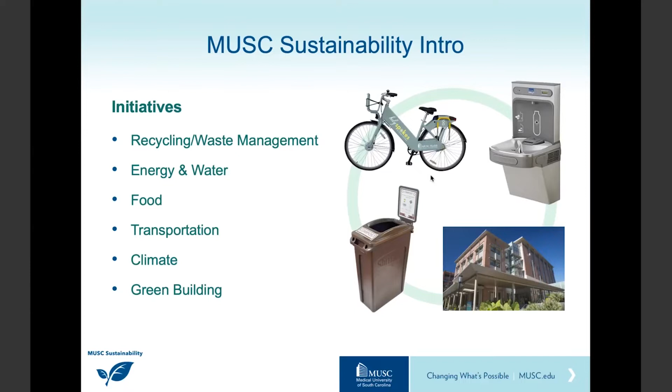We have two presenters today. Christine von Kolnitz is the Sustainability Manager for the Medical University of South Carolina. Christine is an accredited commercial energy manager and a South Carolina DHEC certified recycling professional. Upon graduating with a BA degree from the College of Charleston in 1992, Christine worked as the recycling coordinator for the college. While there, she was instrumental in establishing the South Carolina DHEC Collegiate Recycling Grant Program. Christine became the first recycling coordinator for MUSC in 1995, and then the first sustainability manager in 2005. In 2018, Christine was appointed to the City of Charleston Resiliency and Sustainability Advisory Committee. Christine was appointed to the City of Charleston Green Committee in 2007 and served as chair of its Recycling and Solid Waste Subcommittee until May 2012. In 2004, she co-wrote a recycling book titled Recycling and Beyond, a college campus primer. She is a member of the board for the MUSC Urban Farm and MUSC Arboretum, a Clemson Extension Master Waste Educator, and current chair of the Robert Lunz Group Sierra Club.

Our other presenter today is Dennis J. Frazier. Dennis coordinates the advisory committee planning for the Charleston Medical District, representing MUSC and the CMD. In 2015, Dennis led the effort to create a Charleston Medical District Greenway. In 2018, he joined the city-led flood mitigation effort representing the CMD. He traveled with the city team to the Netherlands to participate in two Dutch Dialogue work sessions in 2019. He was the MUHA administrator for facilities and capital planning, overseeing all facility functions, including building the Ashley River Tower and planning the new Children's Hospital. He is a West Point graduate with a BS in engineering and an MBA. Dennis and his wife, Mary, have lived in Charleston since 2004.

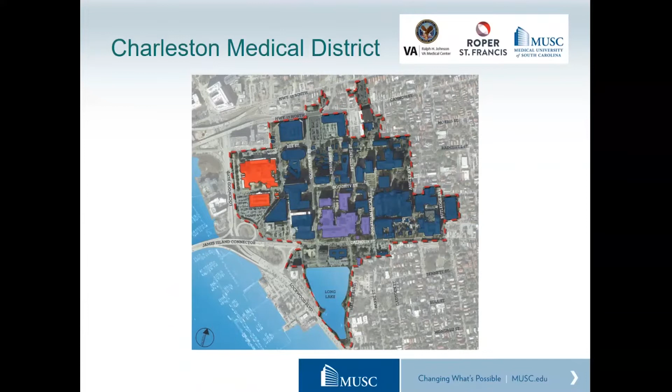This slide shows multiple causes of flooding. The flooding is caused when we have increased precipitation. When it rains, the water comes into the city of Charleston, and it's very difficult for it to get out because the city is such a flat surface. In this slide, you can see how the city is very flat without a lot of topography. So rainfall is carried out of the city through the storm drains, and that storm drain system becomes overwhelmed relatively quickly.

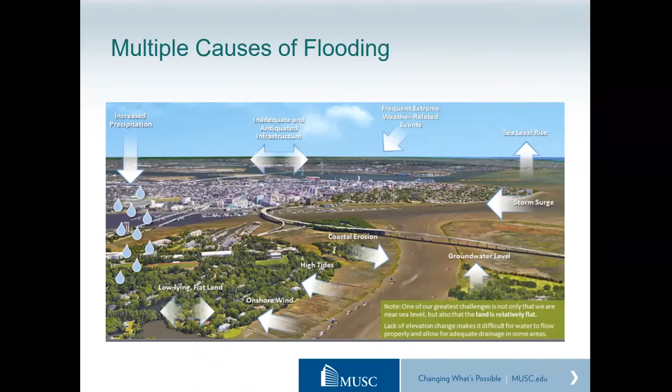So these are the highest tides recorded in Charleston. As you can see, we've got a 12-foot tide back in 1989. That was one of the highest. And then an 8.64 tide in 1934. This is a long range of time that these high tides are happening.

And in these pictures, the top picture, you see a blue piece of tape on that tree, and that's showing the level of inundation that we could have if the predictions are correct. That's a 3-foot level, and that is what is predicted in sea level rise for the city of Charleston by 2050.

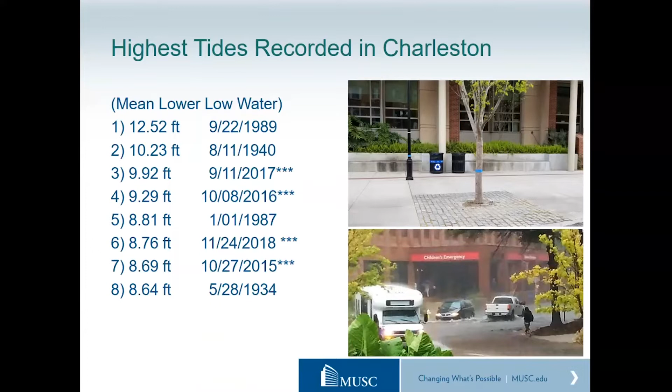The bottom picture shows our now older children's emergency room. We've since moved that. But that is during a spring rain event. That is not a major hurricane. That is an event you can see cars are driving through it, people are walking through it. It's not an ideal situation for access to MUSC.

The flooding affects the entire Charleston Medical District. In this slide, you see the red outline is the medical district. And the light blue, I don't know if you can see my cursor, but light blue is on Bee Street, Courtenay Drive, Ehrhardt Street, flooding on Ashley Avenue, a little bit of flooding on Calhoun Street, and definitely around Long Lake.

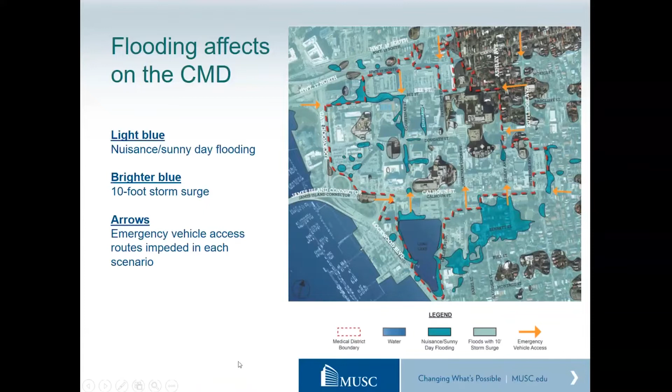These pictures show flooding events that have happened in and around MUSC. So we've got this picture here on Ashley Avenue, and that is a rainstorm. We've also got this picture that's showing a road closed with someone still trying to drive through it, and that is over on Hagood Avenue.

Down here at the bottom, we have two pictures from hurricanes. One is Ehrhardt Street. This is the lowest point on the MUSC campus, and this street serves both MUSC and Roper Hospital. And then this final picture shows inside the ground floor of the Ashley River Tower, and this is floodwater that's come into the ground floor of that building.

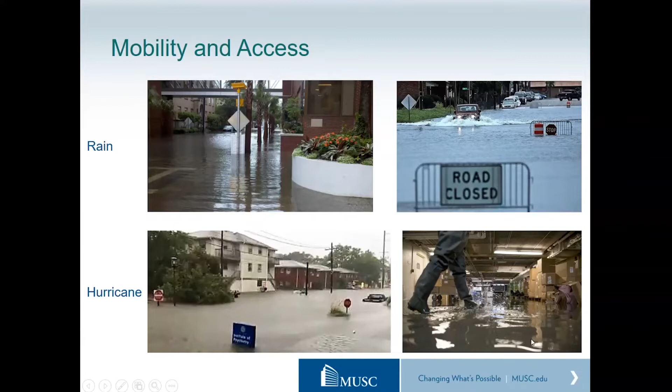Some other mobility access issues. We've got a nurse here at the top. She's walking back to her car at the end of a shift, and she's having to walk through floodwater. Right below that picture is a picture of our public safety. They are trying to get a doctor from one building to another building during a hurricane, and he's having to be taken in a boat.

Down here at the bottom, we have a picture of a military vehicle. This is the South Carolina National Guard. They helped MUSC by bringing their vehicles down, and we used these vehicles to get doctors and nurses from the outer edges of our campus into the core buildings so they could do their jobs.

And this picture on the left top is one of our grounds workers, along with some public safety officers, and the grounds worker was taking a patient to the hospital in this vehicle.

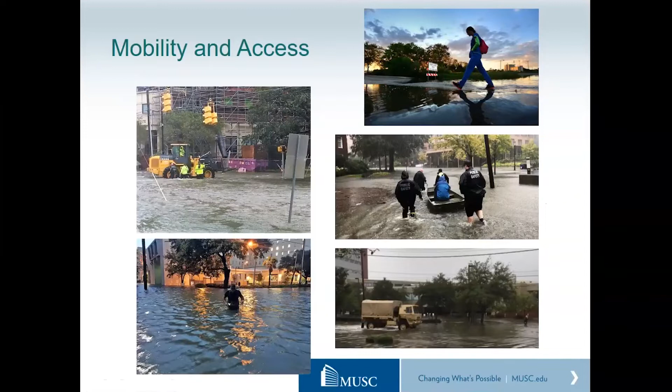And at the bottom, we have one of our engineering facilities employees. He is having to wade through the flood water. He is on Calhoun Street, and he was trying to service a building during the hurricane.

The cost and damage from these events, you can imagine, is extreme. Just from an engineering and facility standpoint, the cost to MUSC alone can be approaching $1 million. And we look at Matthew, Irma, and Dorian, and other ones.

But the cost goes beyond that. It's the disruption of services. It's the rescheduling of patients, or patients that can't get in. It is labor that has to stay at the hospital and not get home for a while. And in other cases, critical supplies and services can't get to the medical center.

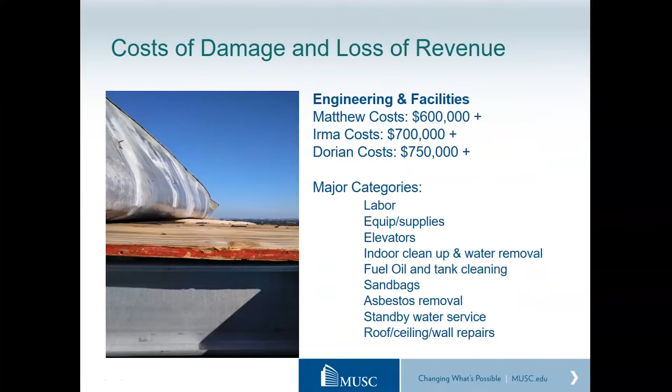So when you look at that in terms of all of the medical district with Roper, the VA, and MUSC, we've been working with those institutions to determine what the cost will be. And at this point, we know it exceeds around $10 million or more a year, and that number is increasing because we're having more frequent flooding. So the cost is already high, and it's going up.

The strategy that the medical district uses is the same as each of the institutions, but it's coordinated. And we're also working with the city.

In general, what you need to do is slow the rain or water down, whether it's coming from above in precipitation or coming ashore in a surge or tidal influence—whatever the reason, you try to slow it down. Sometimes you need to store it, in a pond, a lake, a cistern, or the drainage system. And then finally, when the tide system goes down and the high water event is receding, you try to get rid of it, pump it back out, eventually onto the river and on out.

We deal with it in terms of elevation. We need to elevate some roads and access points, walking points, to be above the flood area. Maybe not every road initially, but enough that you can get from the key points between the buildings of each institution and between the institutions themselves and from off campus. People coming from I-26, or from the crosstown, or from James and John Island, all need to be able to get to the medical district.

Check valves, which we'll show you slides in a little bit, help control the tide water that water drains out, but you want to be able to stop it from pushing back up through those same drain lines. We are in the process of completing deep tunnels, which help drain the water off and pump it to the river. We're looking at surge protection with raising the edge of the peninsula, perimeter type protection to knock down a surge. And then we're also working hard to plan and prepare how we organize and work together and have the right resources in place.

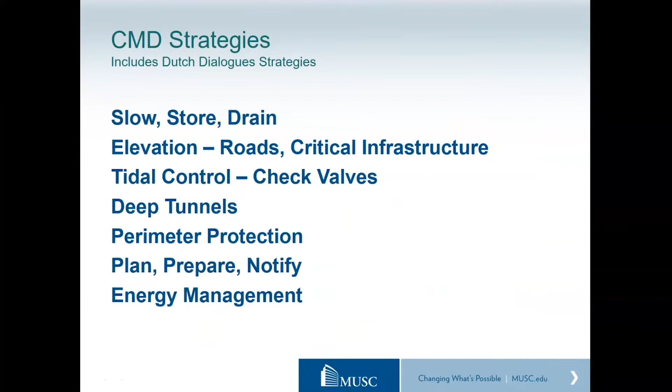And then to be sustainable, we need to be able to provide and deliver those services. We need to have fresh water, food, and to keep the workers and the patients and the people that are in the area able to work and live. We need to have energy in terms of heating and cooling and electricity. We need to be able to get them to the medical district and then back out.

The Dutch Dialogue is a term that represents a company that the city engaged a few years ago to help us plan how to deal with floodwater. As the mayor explains it, the Dutch Dialogue Group has been working on flood management in other parts of the country, and they were working with engineers and scientists in the Netherlands. And so the city of Charleston has brought over the people from the Netherlands and from the Dutch Dialogue Group here in America.

We had two 5-day work sessions in 2019, which brought in well over 100 people from different agencies to help figure out what was needed and create a plan for Charleston. Charleston was divided into 4 major areas of focus: an area on Johns Island, an area in West Ashley, an area near where the Ashley River or the Cooper Bridge comes onto the peninsula, and the medical district.

This shows the drainage plan. These represent areas that drain. Calhoun West has a drain plan contemplated to begin in the next few years. Spring Street, called the Spring Fishburne Plan, is a drainage area nearing completion, probably around 2022. There are other areas more defined around the VA hospital, around the marina, and in the center where these areas come together, called Earhardt Shaft.

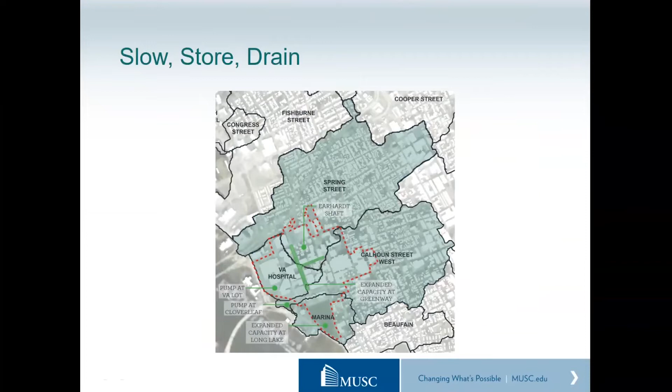You may recall that picture that Christine showed where it was deep water. There's an extension being planned to connect to the Spring Fishburne project and drain that area.

When we catch the water, it gives you an idea how water comes down on our buildings in the medical district. Sometimes we have green roofs, or the ability to catch water and store it into underground cisterns, or perhaps the vegetation helps absorb it. You want the land and the surfaces for walking and driving to be as pervious as possible so water can get through and be absorbed by the ground.

Excess water can flow towards the river, but we might catch it in a cistern, or in the case of a lake such as Long Lake, we might store it there, and then eventually it will get to the river. We're looking at the potential for Long Lake, as an example, to have more capacity, either by making it a little deeper or raising the edges.

The last thing you see is a barrier of some type that will stop a storm surge from coming ashore and doing great damage. That barrier might include a nice plaza. Think of the High Battery downtown, where you have an area high enough to keep the surge of water from coming in, but it's also a nice public space so people can walk along and enjoy it.

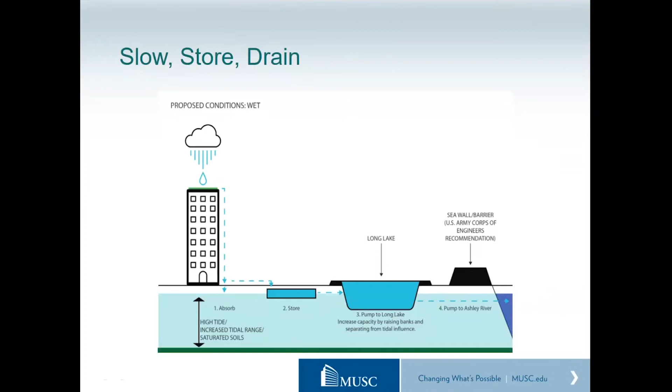In the medical district along Doughty Street, these pictures show how when we closed Doughty Street in 2017, we got it immediately for public use as a space to rest and get some food. It will also become a way of connecting north and south from the Ashley Avenue and the main campus of MUSC, the Horseshoe, over towards the Ashley River Tower on Courtenay and the Children's Hospital.

You see that elevated walkway to the right of the top right image, going past Gazi's. That contemplates an elevated walkway which solves one of our problems: when we have floodwater, people could be indoors and walk back and forth between the different institutions, not only up and out of the floodwater, but also in a conditioned space so you could even transport patients if needed. This connection could also be connected to Roper and the VA eventually and serve us all.

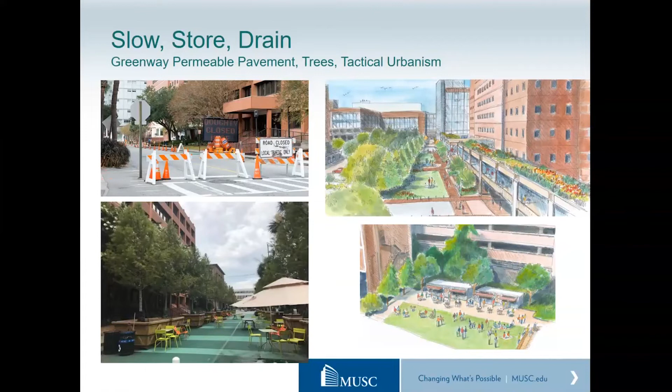The drainage of the medical district also involves existing systems, some of which have been stopped up for various reasons—they're old systems, but they also might have debris in them. The picture on the left shows that recently the city has engaged a company to come and vacuum out these lines, which happen to be under the Greenway on Doughty Street. The picture on the right shows these trunk lines, and the yellow one is between the VA and the hospital, serving Ashley River Tower and the new parking garage that serves both. It has been cleaned out.

The orange lines are planned to be done relatively soon, where they will go in and vacuum out those lines to improve the drainage, and then beyond that will be more of the cleaning out in those other areas which are colored purple.

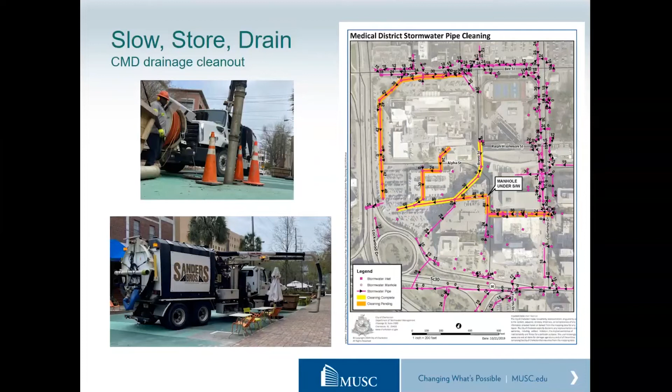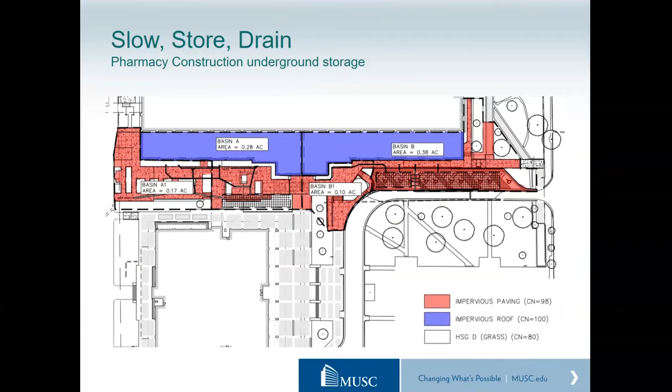Eventually, when the normal storm drain system is able to handle it, that water will drain off naturally.

Other things MUSC is doing: we have a tree policy where all trees equal to the total caliper inches of trees removed will be replaced. Here you can see the front lawn of MUSC with our really old oaks. Trees really do take up a lot of water, and they're a big part of our plan.

One tree can lift up to 100 gallons of water out of the ground and discharge it into the air each day. We are a designated arboretum, a Tree Campus USA, and now a Bee Campus USA. We are really working on our trees.

Then we've got this area off of Cannon Street called a bioswale. We've got trees in there that take up water, and other plants in there that take up water. It's an area where water can flow naturally away from the streets and allow access to continue on our streets.

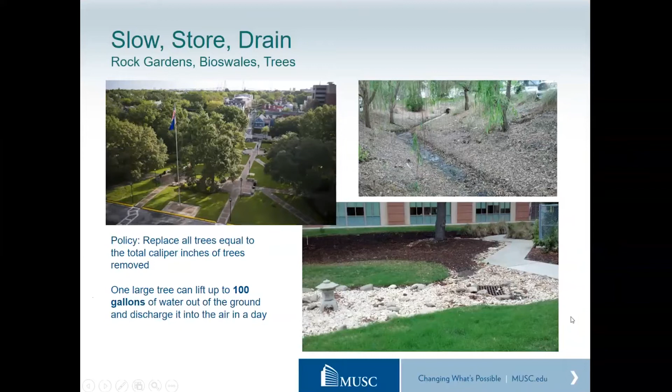At the bottom here we've got a rock garden, and that rock garden allows all the water flowing down toward that drain to go very naturally out of the system and into the drainage system.

We also are employing rain gardens. This is our first rain garden in our urban farm, and we're using natural plants here to take up water.

This bottom picture shows this roof line draining into this cistern, which holds about 350 gallons. That cistern overflows into the rain garden. We've got a whole connected system here in our urban farm, draining water away from our farm.

On the right top we've got a picture of our rainbow row, and we do intend that pun. All of the rain off of this roof comes down into these rain barrels, so we are also capturing water there in our urban farm.

The picture below right is a pervious pad. Our grounds crew is working on not putting down more impervious surfaces, so anytime they need a very flat surface, they're doing their best to make those surfaces pervious and drain water away from the campus.

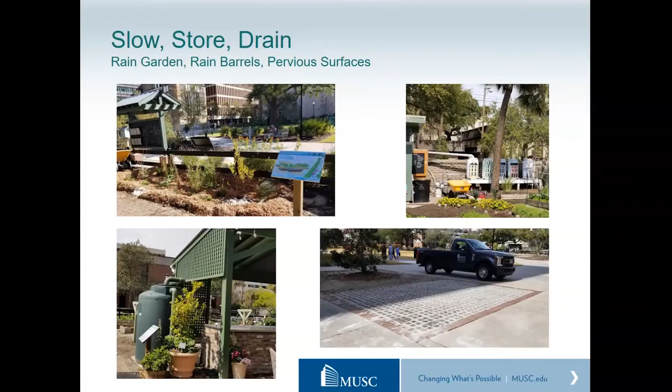The city of Charleston is working very diligently to help control tidal flow coming back into the city through the drain system, so we wanted to explain what a check valve is.

Check valves are inside of the storm drain system. They work so that water can flow out of the city but not flow back into the city. Here you can see water flowing through a storm drain, and the check valve will open one way and raise up, allowing that water to flow out into the river.

Now, when we have a high tide, the check valve works in the opposite direction. When the tide tries to come back through the storm drain, the check valve stays shut and will not allow that water to come back into the city. That is how a check valve works.

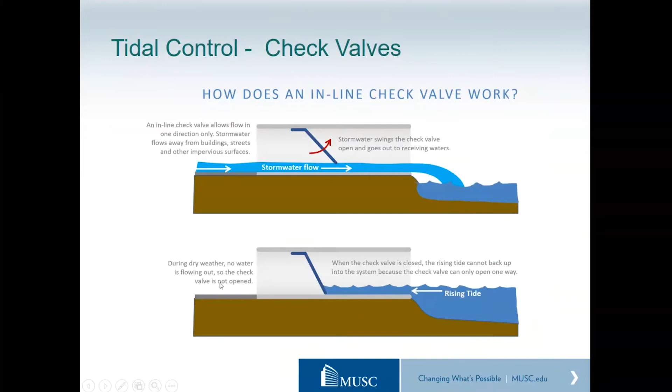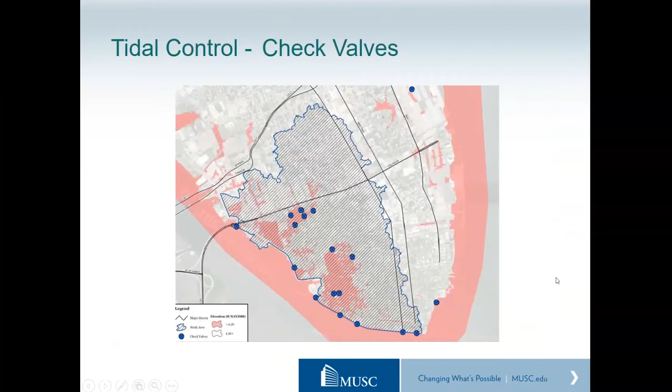The city of Charleston is employing these check valves. All of these blue dots on this map show where the city of Charleston is putting in check valves, and that is keeping water from the rivers from coming back into the city.

We've got two pictures here to show visibly what these storm drains look like. Here's a storm drain at low tide on the Ashley River. You can see the Ashley River Bridge in the background and the marina, and there's a person here to give you an idea of how large this drain line is from the city. You can see the water flowing out of the city, and it's a sunny day, so there's still water coming out.

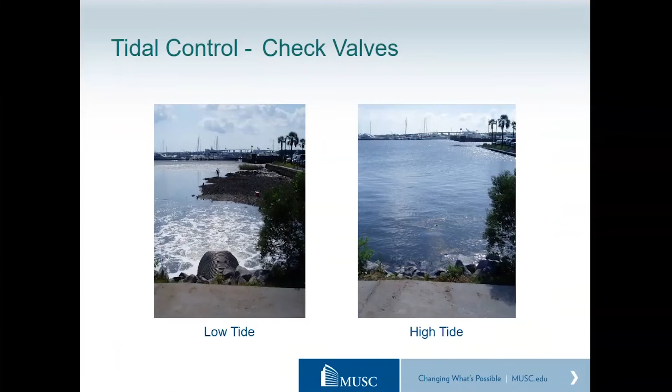And then here at high tide, you see that drain line is completely covered over. So that is what happens in the city of Charleston. If we did not have check valves in the drain lines, that water could flow right back into the city of Charleston.

The elevation of key infrastructure is critical to be resilient, to be able to sustain yourself, whether it's a hurricane or high water. When we built Ashley River Tower, and more recently the Children's Hospital, it had all been planned with an energy plant that was elevated above ground. If you've ever parked in the Bee Street garage, the end of that garage towards the VA has the energy plant, which serves the Ashley River Tower, the Children's Hospital, and also has capacity and size to serve the future third phase of the hospital, which will go where the fitness center is.

In the main hospital and Children's Hospital, Storm Eye area, their systems years ago were not elevated as high. So around 2015, 2016, Medical University Hospital Authority built this energy plant this picture shows, which is up above the ground, and took use of every available space. You can see a part of it is even cantilevered out over the roof of the children's hospital side, and it provides the heating through steam generation and the cooling through chilled water.

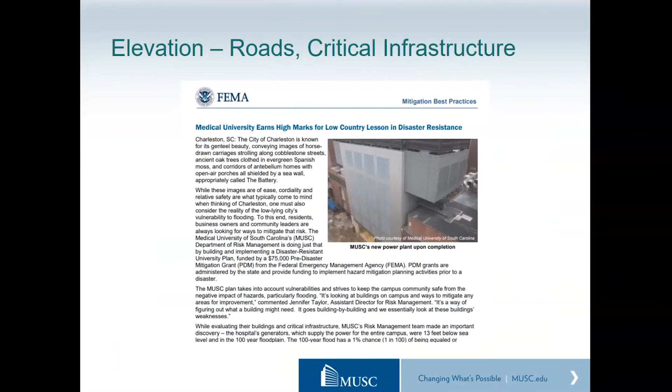Next slide. Here's another example of elevation. Top left is over between the fitness center and Ashley River Tower, where that air handler and related equipment was elevated up so that it would be up and out of the flood water area.

The bottom left shows where drug discovery and bioengineering, when they were built, were wisely raised up, so the flood water down on Jonathan Lucas and President Street are down lower. The other street there is Hagood Street, going from the crosstown towards the Citadel, and you'll see how flooded that is. In the future, the West Edge project, which has already elevated some of its streets, has a plan where this street can be elevated enough so that you can get on that street and move through it during high water conditions.

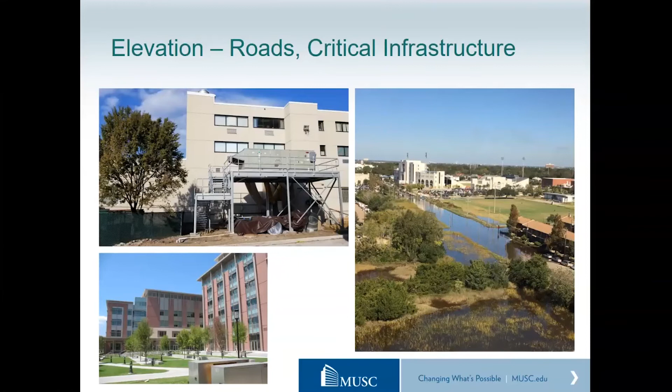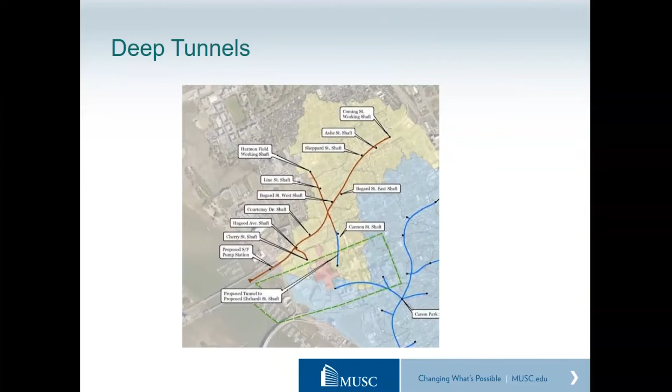This is a deep tunnel, looking down vertically. This is a shaft planned for Ehrhardt Street. You may recall when Christine showed a picture earlier where it was said to be deep - Ehrhardt's one of the lower points in the medical district. This shaft is being planned to connect to the Spring Fishburne project in the next 2 years, and will help increase the drainage in that Ehrhardt Street area, but it will also serve out towards Bee Street, back up towards President, and out towards Courtenay, and over towards Roper. All will benefit from this.

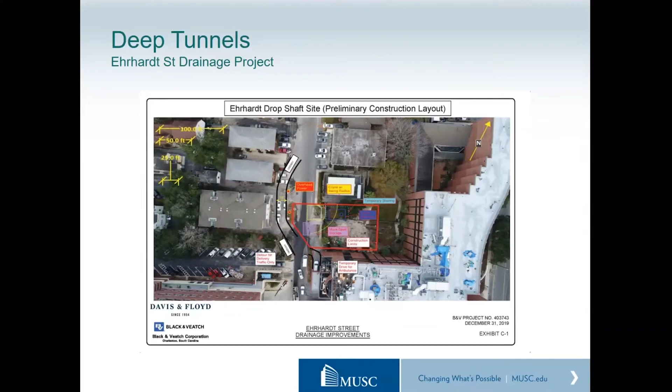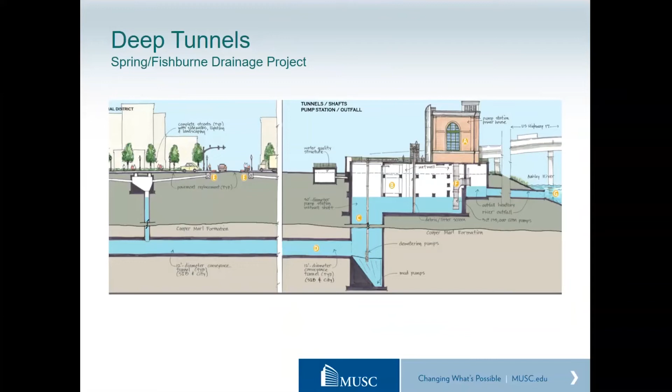The drainage tunnels work like this: if you look to the left side, there's a shaft where water comes down, then goes down around 105 to 110 feet to a horizontal shaft where the water goes toward a pump station out near the Ashley River. The water stores there, and as it rises, pumps kick on and push the water out into the river.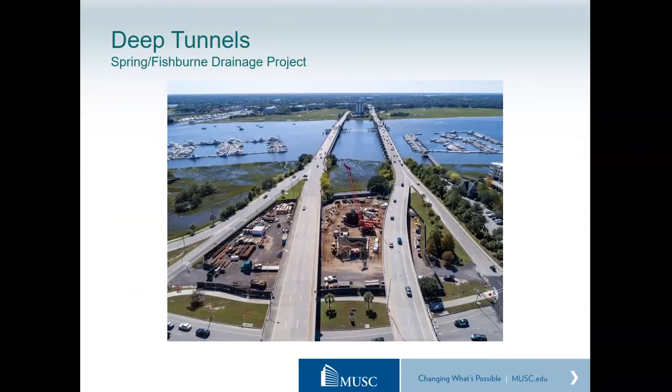The perimeter protection is an extension and improvement over what you're already familiar with. If you go to the high battery and even the low battery, there's coastal edge hardening so that the tides don't erode it.

You may recall that in the last couple of years there's been tidal surge up in the North Carolina area, which did extreme damage to cities where the water came ashore in a hurricane, damaging buildings and their services and facilities. That's the intention here: the Corps of Engineers has been studying this project.

They have a project working with the city called a 3x3, a 3-year, $3 million Corps of Engineers funded project. They're looking at a barrier that might go all the way past the Citadel to high ground, around the battery, and back around up towards the Ravenel Bridge, the Cooper Bridge, to high ground, becoming a barrier. That's a multi-phase project that would be done over many years.

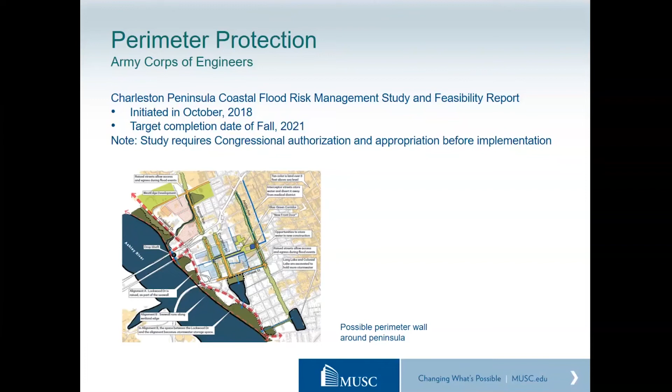This is also perimeter protection. In the last slide, you could see that the study being conducted has a target completion date of fall 2021. It will take extra time to receive congressional approval and funding, and more time to design and construct.

15 feet of marsh can absorb 50% of incoming wave energy. It's also more resilient because the marsh can quickly bounce back after a storm or a flood.

Again, while we're waiting on the Corps of Engineers flood risk management study, we can implement a natural perimeter. The South Carolina Department of Natural Resources received a grant that MUSC was very supportive of. They will be installing oyster beds in the area between the Coast Guard Station and the Brittlebank Park.

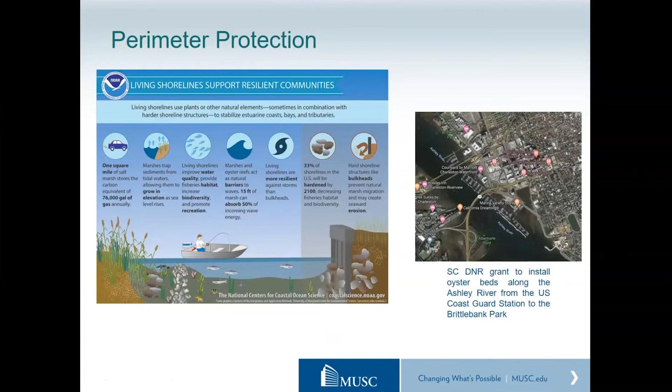Another part of planning and preparing is to look ahead at how we can deal with connections between the buildings of MUSC, and also between the Medical University, Roper, and the VA.

This view is from standing on Courtney Street at the intersection of Courtney and Doughty, right in front of Ashley River Tower. To the left is an elevated walkway that would connect from Ashley River Tower down past the Gazeys and on toward President Street. The library is off in the distance. To the right is where the parking area of the Roper Medical Office Building is now.

This contemplates the complete closure of Doughty Street in the future. Right now only one lane is closed, but eventually the other two lanes would be closed as well. It would become public space, elevated so people could walk, with the ground surface raised a few feet so it wouldn't flood.

You could have a water feature there that's nice and conducive to being peaceful for patients, family, and employees. But also underground, it could be a cistern that stores water, perhaps as much as 1 million gallons.

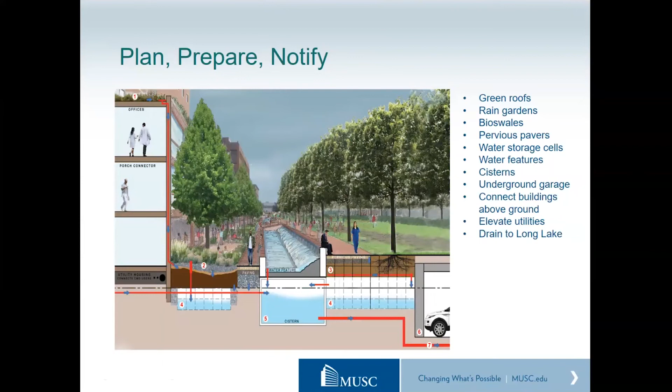Long Lake, in that top center picture, the blue portion there, is part of the medical district, across Calhoun Street. It used to be really just an extension of the Ashley River, and there was a marina there. Years ago, when they built Lockwood, that road ran along there and became a barrier, and so it became a lake.

It's a lake we want to use not only for public purposes, because it's a nice place for families, patients, visitors, employees, and people who live here to enjoy, but also a place where we could pump flood water as necessary to store it until the flooding goes down. It's about a 10 or 11 acre lake, which means it holds between 2 and 3 million gallons for every foot.

At low tide, with a new flood check valve there, we would be able to let the water drain out of the lake down to low tide level and then stop it from coming back in. Then when it rains and we have a storm, we could use that lake to fill it back up with flood water to help drain other areas of the medical district.

The bottom left there just shows how the lake would be improved. It would not just be a lake for storage of water, but we contemplate that it would be a nice park area. You could walk around it, or perhaps get a boat and go out and row or sail. Next slide.

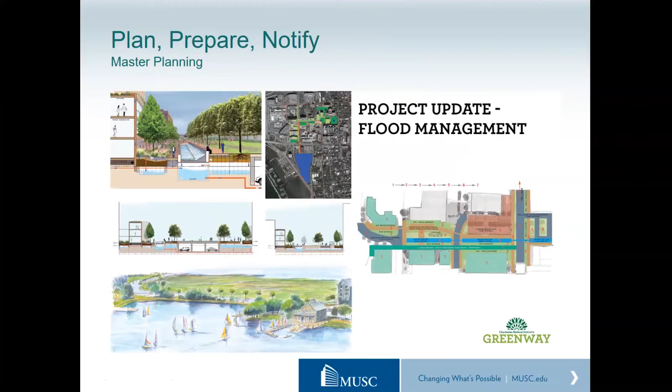Master planning is already underway with MUSC, with Roper, the VA, and the city. In fact, the master planning at MUSC has gone on for many years, and it's updated every 4 or 5 years. MUSC is in the process of doing another review. The same is going on at Roper, and the VA is nearing completion of their review.

What we want to do is work with the plans for the Sean Jenkins Hospital, the VA, the West Edge plans, and the city's plans, looking to the future of what we might see with access off of the crosstown into the medical district and between us and West Edge.

The needs along Courtney Drive, and how emergency departments and patients can come to the 3 medical centers, public intermodal transit, the light rail, or the increasing number of vehicles and bicycles people are using, all different ways to improve access to come and go from the medical district.

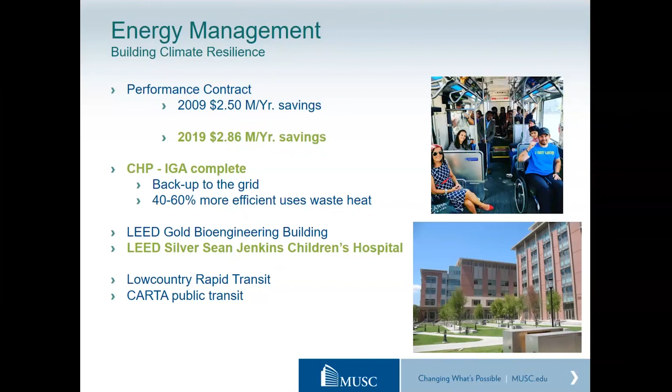I want to thank you for joining us today. Just trying to end off with a little bit of humor here. So you see this water pump here - this is the old way of doing things. And you saw in our slides a lot of the new way of doing things, drainage systems and the check valves and all of that.

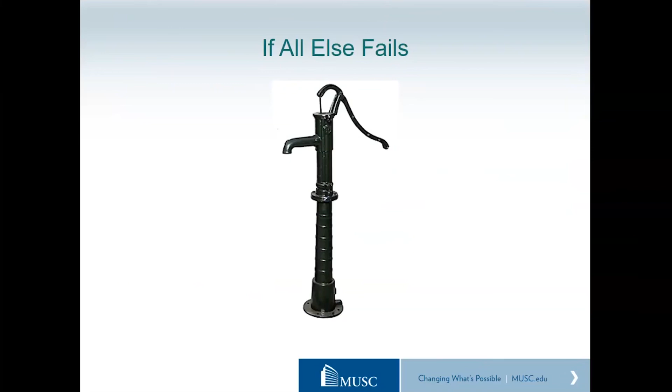We are working very diligently to keep MUSC, Roper, and VA high and dry, and we will continue to do so throughout the next years, working with all of our partners. Dennis, do you have any final thoughts? Well, thank you for your attention again. You can see that a lot of work continues despite the current situation with COVID-19. We're working at a distance, but the floodwaters are going to continue to rise no matter what we do. So we appreciate your attention and welcome any suggestions or comments. Thank you, everyone.